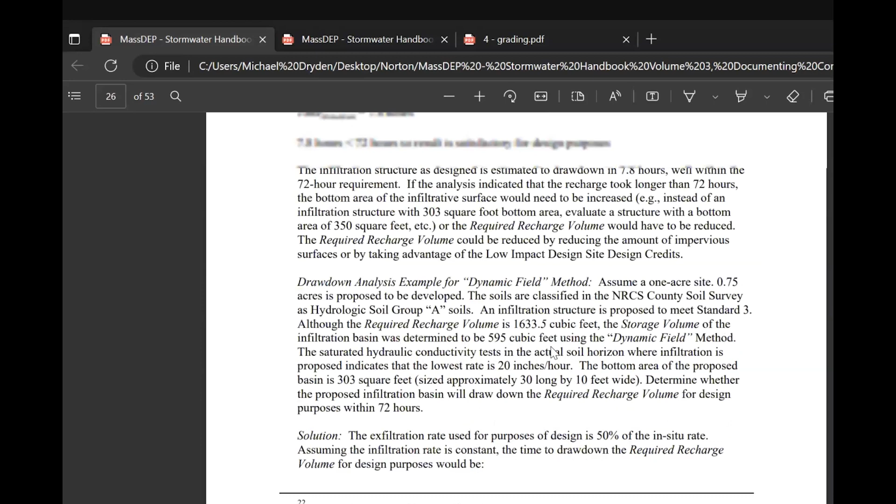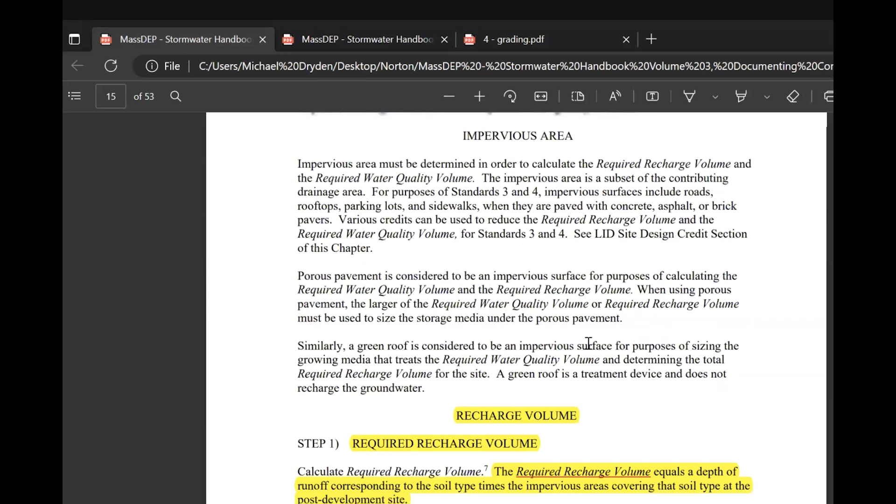So to define the required recharge volume, let's back up a little bit. I can't find my book - I think it's on page 15, I don't have my bookmarks available in this version. Right here - so if you back up, this is how required recharge volume is defined and calculated. This is exactly what we've done. This is what we do in every community and essentially every town we work in. So without getting into the weeds of how this is done, we followed this expressly to the letter.

And then when Mr. Chesia initially disagreed, we said, well okay, we'll put some belts and suspenders on this and we'll go all the way up to the 10-year storm, which is a far greater volume than the numbers I just read to you. So we've already made concessions and tried to put belts and suspenders on here, but he seems to just be stuck on this. And DEP doesn't point to a specific storm? No, they point to the required recharge volume. It's that simple, and this is exactly how you calculate it.

I'm not showing you anything other than what's directly from the Mass DEP. Okay. So John, Thomas, I understand Mr. Chesia is absolutely doing his due diligence based on his experience, which is pretty extensive. So I'm wondering if we could perhaps just turn this into a condition. I mean, what does being a condition mean? We would articulate in the findings what the recharge volume that was provided based on the design was, and then maybe just put a finding in there of what the peer reviewer required, just for the record.

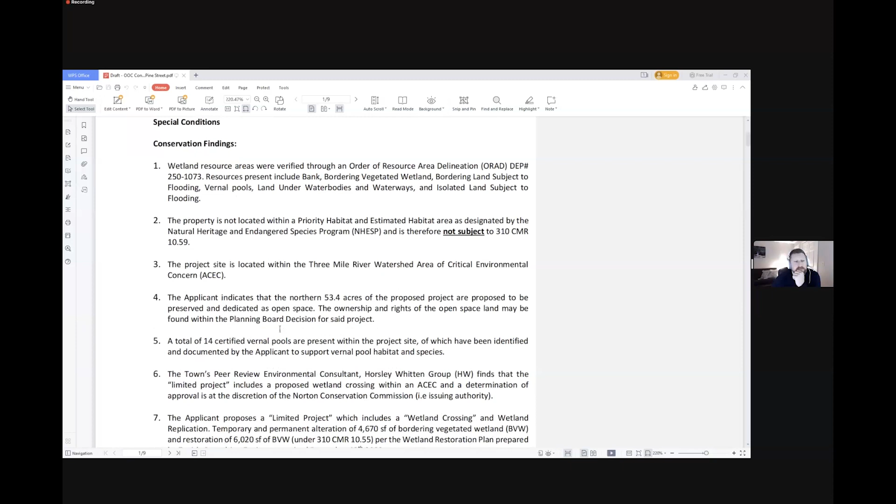I'm wondering if we should put the opposite up in the conservation findings in 1 through 7. So we say what it excludes, but I think we should put what it includes in 1 through 7 somewhere. I could definitely do that under conservation findings, so it's very clear, like this is the only thing you're allowed to do, never mind what you're not allowed to do.

Yeah, so one of the other things, this was kind of what I thought of. Actually, I can just share it up on my screen here. I don't know if you see that, but that was one of the conditions that I was looking through just to double check. Sorry, I had a lot of orders to deal with today.

But one of the conditions was the fact that there was no stream channel depicted on the USGS map, and that there are no observed stream channels present within the wetland crossing area. This is all for the wetland crossing area, and that the 1.2 bankfull width was determined utilizing a drainage area confirmed through the ground truth survey and USGS stream stats, which Claire and the peer review consultant discussed at great length. So that was one of the other things that I wanted to bring to the attention of the commission.

The reason I think it may be important to include that is if somebody's looking back on this someday, going, what did they do, why did they do it? It just provides some context.

Yeah, and that's another point that I wanted to add to this, and I was going to put it in the top of the wetland crossing findings, right before number 9, it's one of the things that I missed. I think that makes sense. And I think most of the other ones were administrative.

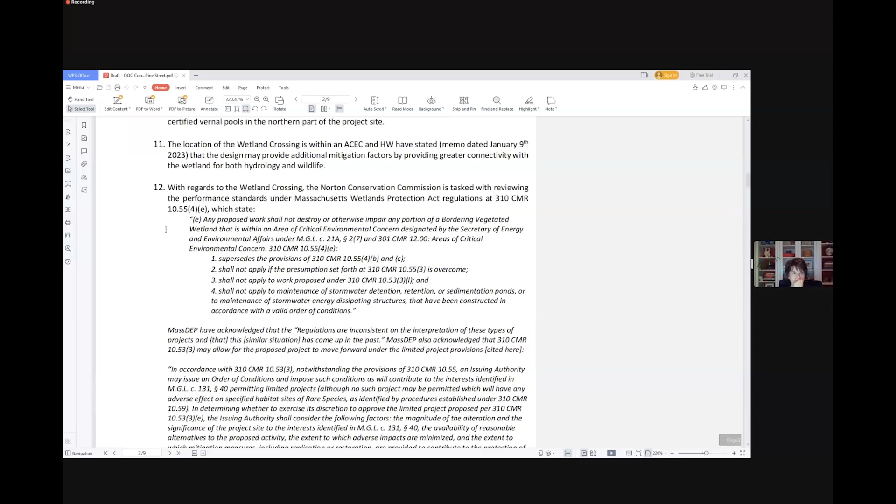I tried to word it the best I could. As it pertains to a lot of, and it's actually not condition number 11, I've changed numbers, it's actually number 12, which is this one right here. So this was kind of all the stuff taken from context from discussions with DEP and also the Wetlands Protection Act. So it's kind of validating the decision made by the Conservation Commission for the wetland crossing, and then here is kind of just the findings for this.

Yeah, I'm just a little confused by the first one. Okay, Commission finds that the applicant proposes the following: an alternative for access which does not... Oh, okay, I got it, I guess I had to read it out loud. Okay, so these are just more findings.

So do we have the actual wetland replication area ratio? I don't have it off the top of my head right now, but it's greater than 1 to 1. I can't remember exactly, but I want to say 1.5 or 1.6 something. Okay, that's fine, I could add that to this.

So maybe at 16 it looks like there's something there. The end of 16, oh yeah, this order, please strike that, that's a mistype. This is an older PDF, okay.

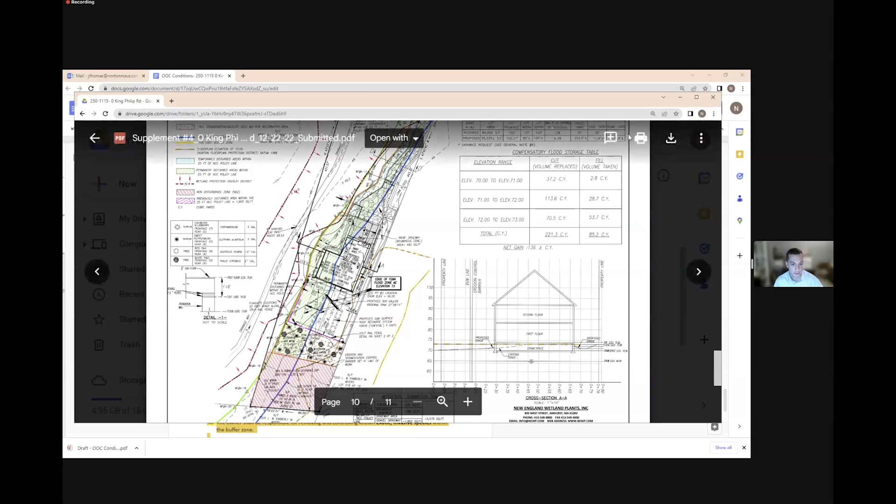All right, so my thought is, can everyone see my cursor? Or no? Yes, okay, vaguely. All right, give me one second, apologies, let me actually just draw this up so I can get the commission's approval.

I don't know if it helps, but there's a detail sheet about the split rail fence in the back as well. Yeah, they're gonna put a split rail fence there. Megan, that shows what it's gonna look like, but probably not where it's going. I think that's the difference.

So let me actually just bring this back up. Mark, Fernandez, I think you found your calling in life. That's my one skill, I guess.

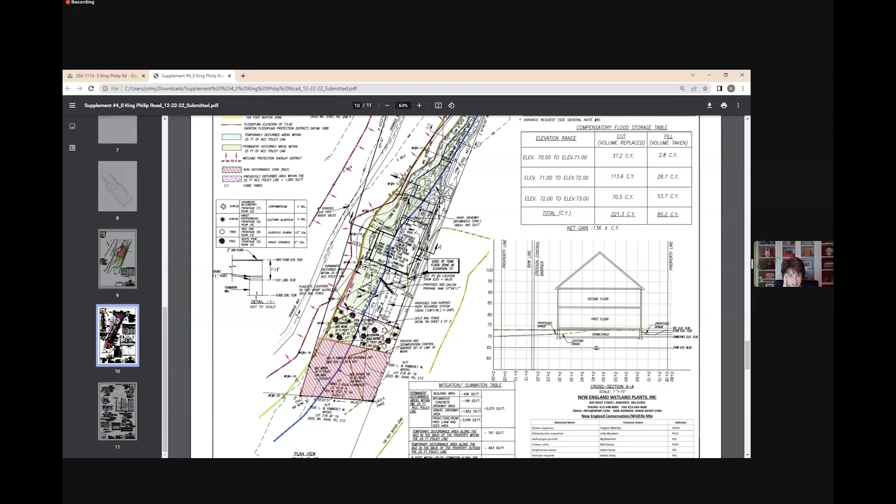You're gonna look at all these from now on with an eye towards that. For some reason, I'll never get one by me. Sorry, for some reason it's not working for me. Give me one second, trying to get the correct...

You trying to import the image into the PDF? I'm trying to open it up so I can draw on it rather than in the web program. Oh, I see.

Okay, here we go, apologies, technical difficulties. All right, can everyone see my cursor now? Yep. Okay, sorry, let me just do a comment here.

Highlight. So I'm thinking, or I can't do that. Oh, there's no highlighter? So here's my thought as to... usually I don't have this, I don't do this normally on my home computer, so I apologize. What was custom graphics, there's an option for that. Yeah, I don't know, John, the highlighter won't work? I have no idea, I'm just trying to get a line. The highlight button, all right, here we go.

This is what I'm thinking. You just go like this, and then you go like this. I can do this on the computer at the office, it's a lot easier. What I'll do is take this and take it to there or something like that. Just offset it from that force main. Right, offset it from the force main. So can you go south just a bit again?

First of all, I just want to bring something to the attention on the legend. They have the pink line says split rail fence. Oh, that's interesting, because it should be behind that. No, they said they were going to put a split rail fence. Oh, all right, well that's even better, Mark, because they're protecting even more. Right, that was going to be my question - I understand they're restoring that area too. So it seems like it makes sense, but it looks like they stopped the split rail in front of it, along the house.

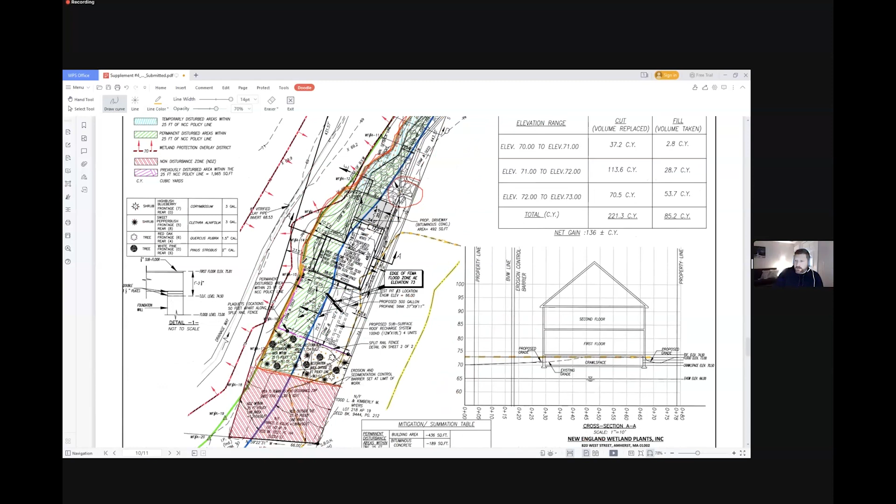You said come up to 12 - should it end there? Because I think the chances of them going further on that side, since it's lawn and pushing the envelope, are much greater than along the driveway. I mean, they're in the drink - they're not gonna start planting lawn along the driveway.

And then something like this, is that what you said? Yeah, okay. And then that way it's not the expense of doing it the whole way. And then in between, no posts, but they should know where the resource areas are.

How do we mark that off? I don't know, how far apart would the posts be? Every 50 feet. All right, well that's not so bad. I mean, it's not gonna stop them from plowing, but it will. Okay, just so you'll probably have one...

So it'll be a combination of split rail up to A12, and between A12 and A6 it'll be posts spaced every 50 feet. Does that seem fair? That's reasonable. It's not split rail the whole entire way, right? But okay.

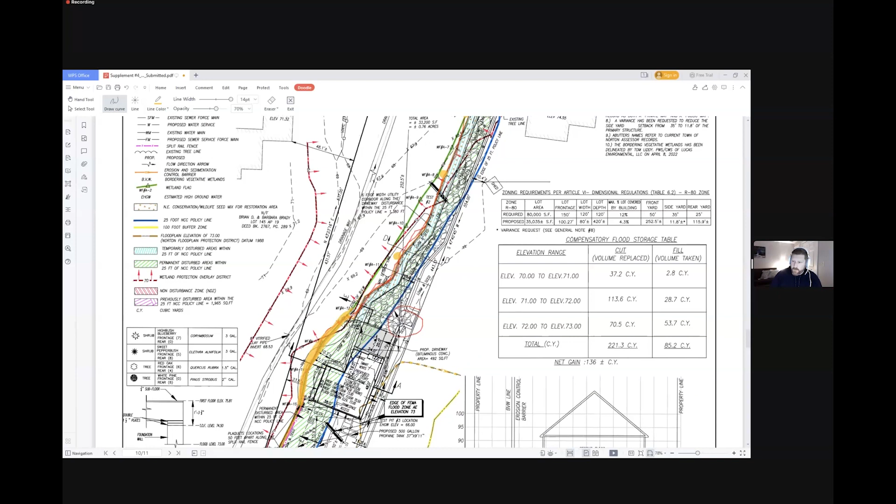I will put that in there and I will probably just have a diagram showing this, just take a snapshot as such, that we have identified two posts and some split rail up to wetland flag 12. And then from wetland flag 6 to the north to the street, knowing that the force main is going to be there too.

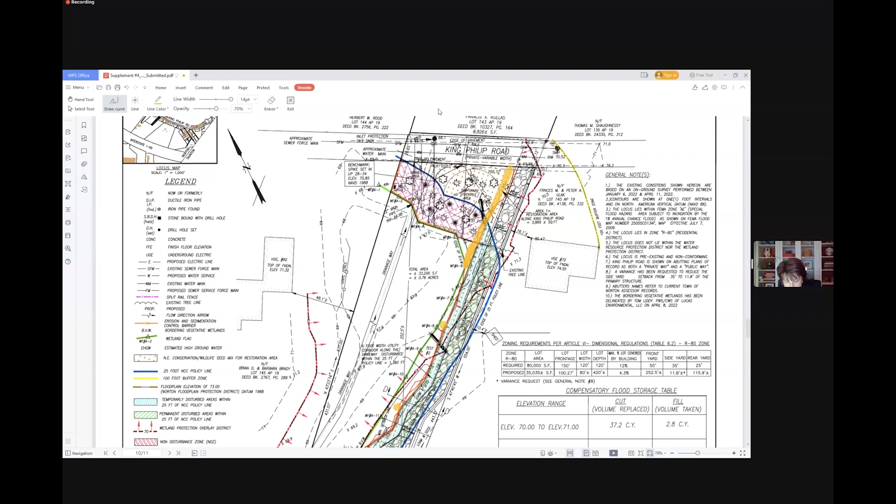Does that seem reasonable? Yep, good. Okay, so were there any other comments on the draft order? No, I didn't have any. If not, I can entertain a motion to issue the order of conditions as discussed.

So moved. Motion by Ron, second by Dan. Roll call: Ron, aye; Dan, aye; Mark, aye; and I'll vote aye.

The next item is the draft order of conditions for file DEP 250-1114, 306 to 308 East Main Street. Just calling that up. Yeah, give me one second, I'm pulling it up right now. Thank you.

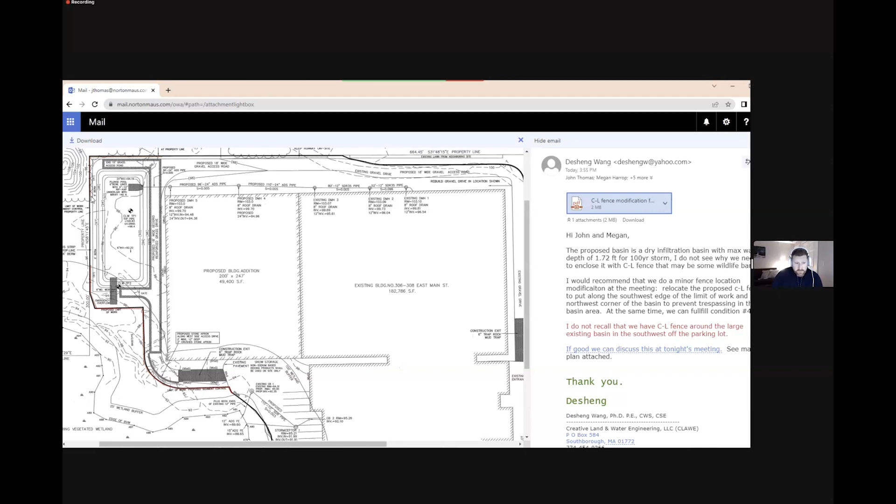But it's part of the project, so that's why you're going to incorporate it. But if you are going to potentially have a fence that goes from here to here, I don't see any issue with that. Okay.

The basin originally on one of those plans, we did mark chain fence. I didn't realize it's probably because the existing smaller infiltration basin has a chain fence around it. But if you look on the south and southwest, the big infiltration basin has no chain fence around it.

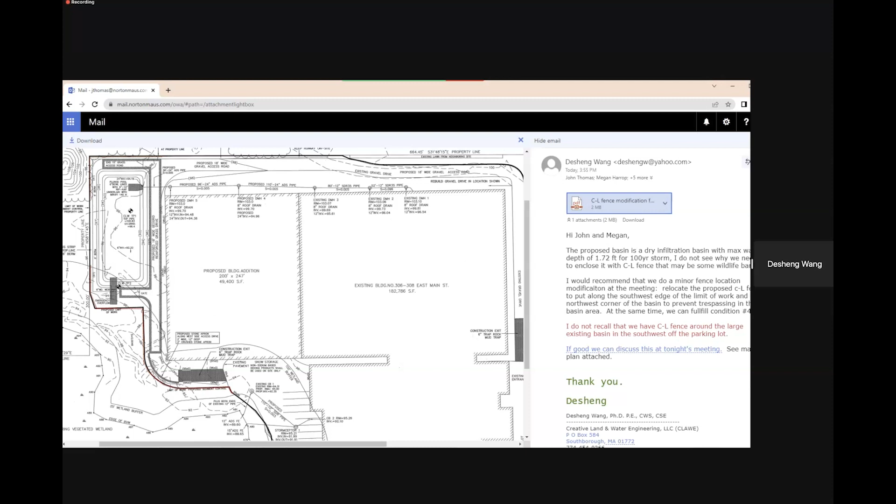I think it's a dry basin. This basin has a maximum water level of about 1.72 feet deep, and it's going to be dewatered in a couple hours, so there's not really a safety concern with fencing that close to it. It's really not going to benefit anything. So this chain link fence barrier, probably 4 feet, will be adequate.

That's also based on the commission's input. I know lots of towns use a monument about 2 feet above ground. So it's up to the commission whether you want the chain link fence at 4 foot or 6 foot. But I feel the 6 foot is more of a visual barrier rather than an actual barrier to preventing dumping.

John, this is Mark Arnold. Regarding this fence, the applicant is willing to propose it in the buffer zone in a manner amenable to the commission, whether chain link or something else, as long as it serves as a barrier. For the purpose of this condition, we have no problem putting a barrier along the limit of work, which protects a lot more of the buffer zone than just the 25 foot. Whatever manner that is, it'll definitely be wildlife friendly.

Other fencing on the property around the base and top may be considered, but at this point it's not proposed. John Thomas, we just need enough wiggle room in the condition so it's at their discretion what they want to put in, as long as they facilitate wildlife passage with a gap. I'll put that under advisement and include it as a stipulation, to evaluate prior to receiving a certificate of compliance.

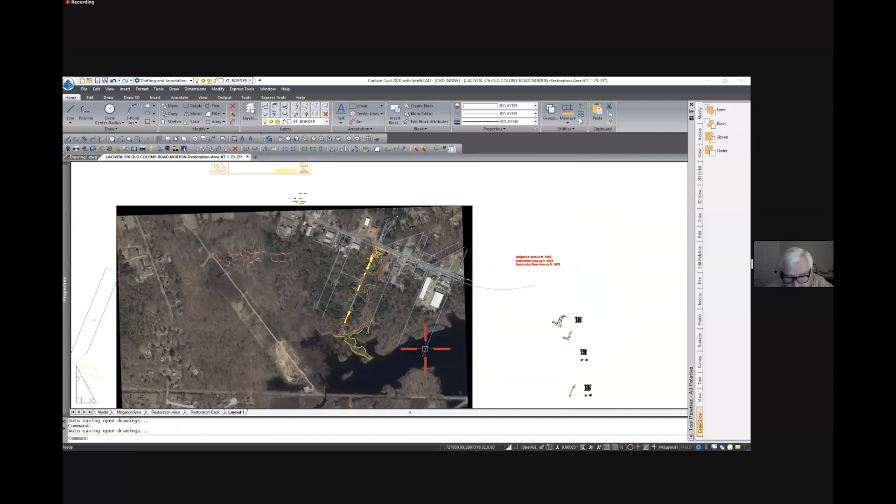As you can see, a very large parcel. That's Chartley Pond. In the past, we went out and delineated this past spring. I've got 4 areas of impact coming down an existing roadway. There's a lot of roadways out here. This is a former retail nursery. These are all greenhouses back here, and there was an old barn that's collapsed, a 2-story space of retail, and it had an apartment on top, but they're not gonna let him use it as an apartment. He wants to come in and have display.

Ken, before you even start talking about what he wants to do, why don't we talk about what he's proposing to do as part of the mitigation, to give the commission a sense of how the applicants... You gotta file a notice of intent for what you want to do. He knows, he knows.

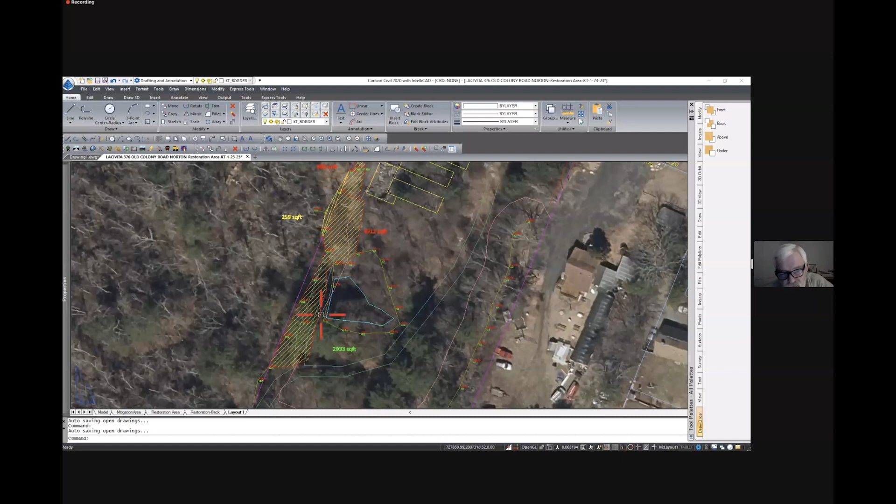The acreage is large. We were gonna build a road in here and excavate out, there's 2 feet of fill in here with 3 feet of muck underneath. So it's remove the fill, fluff up the soils. This is a culvert crossing that's in place. We'd like to leave that, restore it as part of the notice of intent, to upgrade that, to handle trucks, dump trucks.

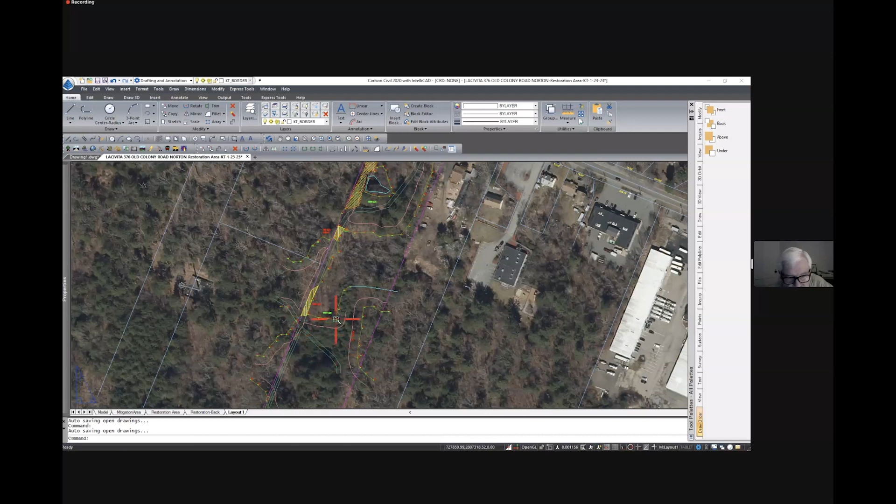This is the end of the road here. Before he gets into this area down here, which is a large upland hill, he wants to flatten that and build siltation basins and things like that. And then there's another section of the road down here. The road goes all the way out to the peninsula. There's a road that goes all the way out.

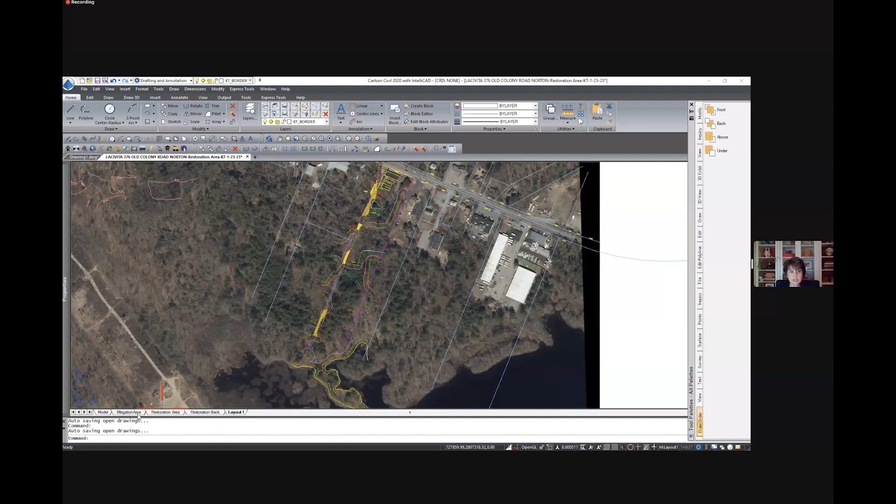So what I'm seeing is that we need restoration plans and specs, sequencing details for restoring those wetland areas that were filled, correct? That is correct.

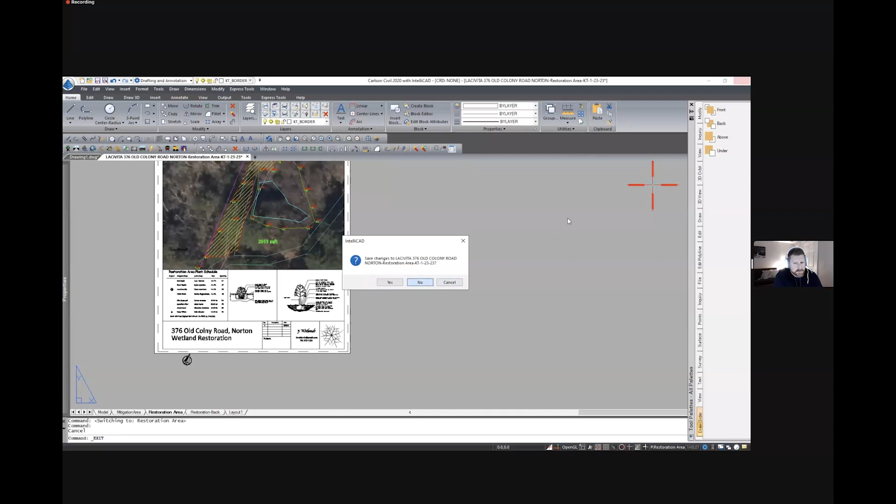I've started mitigation plans just to begin with. It's Army Corps style, trees 10 foot on center, about 50% of the number of trees is shrubs. I only have to make soil within this rear mitigation area, restoration area. And then we're gonna have a mitigation area for the culvert crossing and the end to get to the upland hill, as part of the notice of intent.

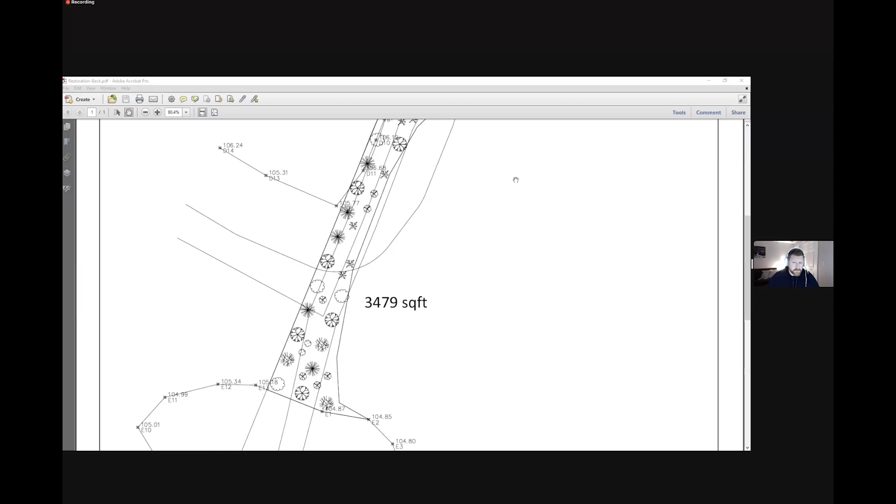So Ken, before we even get into the notice of intent stuff, let's talk about the mitigation part, to get in compliance with the enforcement order, that is, to kind of repair the damage that has been done by the previous landowner.

In the two restoration areas, we're gonna remove the fill and plant it, stabilize it using erosion controls. To mitigate for the culvert crossing, the permanent impacts of the culvert crossing and this little tip here, about 5,000 square feet, we will create a mitigation area where we will make the soils, do the Army Corps planting, stabilize it, monitor it. So there's about 1,100 square feet of permanent impact in the end, and we're gonna create 5,000 of mitigation. So it's about 4 to 1 for you.

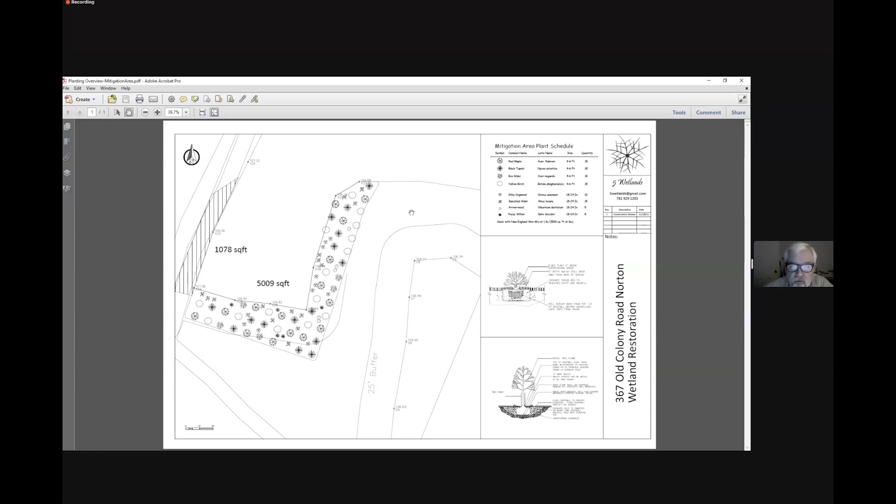Now, the other two areas, I'm gonna bring up... unshare, stop sharing. So do you have topography in all those locations? He does, based on what I saw. The engineer is still working on it.

Okay, so we're coming up with a restoration plan to remove the fill that was placed illegally and then a planting plan, is that correct? Yes, and what I'm hoping is we can do the bulk of this work under the enforcement order, and then do the final stuff, the site development, the crossing, the repair of the culvert and things like that, under the notice of intent.

Otherwise, this is a 2-year permitting process because it's over the 5,000 limit. We have to go through MEPA, water quality, and Army Corps too. Why do you have to go through MEPA? It's over 5,000 square feet of impact. You gotta review your regs, that's not why you go through MEPA. If it's a limited project, it's a limited project. You don't have to go through MEPA if you meet performance standards, so I'd take a peek at that again. John, Thomas, we need to separate what activities prompted the enforcement versus deferring stuff to a notice of intent.

I think that's critical. Is there a copy of the original enforcement order somewhere for review? I didn't see it. I don't have it on file.

I have a lot of correspondence from my predecessor, requesting information from the previous landowner. They've sold this property to Ken's client, and Ken's client has been willing to take on the responsibility of pursuing this. I've been trying to best guide them on the procedures, but I think the most important and imperative thing is to take a good stab at the wetland mitigation portion, getting an understanding of the confinements and the whole details surrounding this mitigation, and then take a look at the next phase, which would be what he wants to do to improve the remainder of the site and bring it back into compliance.

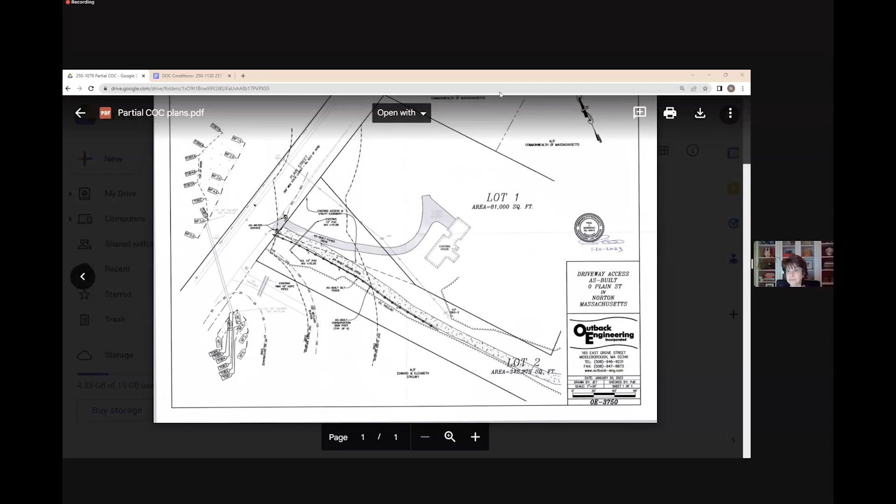So moved - Ron made a motion to issue. Second? Is that Mark? Yep, seconded by Mark. Roll call: Ron? Aye. Mark? Aye. Dan? Aye. And I'll vote aye.

Okay, now meeting minutes. Yeah, that's all I have. Sorry, we've been bombarded with a lot of stuff. I know, there's a lot more stuff coming too. Okay, can't wait. All right, let's see.

These are quite extensive. Oh yes, they are. The funny thing is the spell corrector keeps changing Stormceptor. I keep Googling it to make sure I'm spelling it right, and I think it's auto-correcting it for me. That's okay, we know what you mean, but we probably want to fix that. But everything else I thought was very detailed.

Okay, now go, Dan - something about, okay, I gotta get my comments. Where are my comments? Remember, I'm pregnant, so don't make me cry. Yeah, don't go easy, Dan. Oh, in that case, everything looks great. When the baby comes out, then I will - well Dan, I heard you've volunteered yourself until July 6th. Yeah, to be- yeah, this is, well one thing is, if I may ask - he's ignoring that, he sees how many pages it is and doesn't even want to talk about it.